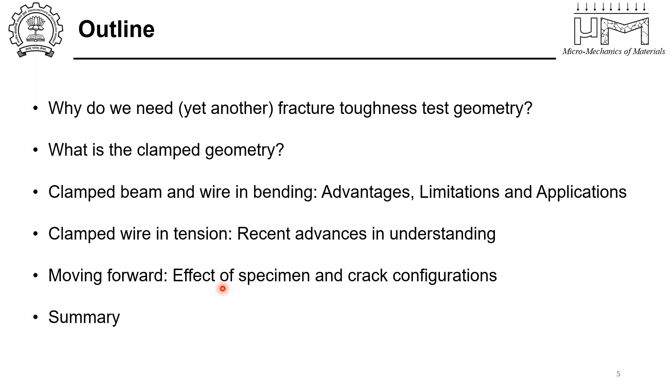Then I'll talk about the details of the clamped condition for both the beam cross section and the wire cross section, the advantages, limitations, and applications of the same. Then I'll talk about the clamped wire in tension as well. Although in tension, these wires have been very well studied, but we have come across some recent changes or advances in understanding them. So I'm going to talk about that if time permits. And moving forward, where we are heading with respect to specimen and crack configurations, what effects they have on the measurement of fracture toughness from different geometries. So then I'll summarize. So how do we assess structural integrity, right?

That is the key that begins all this story about measuring fracture toughness, first of all. So the structural integrity of any component, if one has to analyze, then there are three main components to it. One is that you need to have a stress analysis carried out for that structure. You need to find out where there are maximum stresses, which might be the pressure points for failure. So that can be done with some model structures where you apply real-time loads, or by numerical finite element sort

of modeling techniques. Then, of course, you also need to know the largest defects and their distribution in such a structure, which is usually done by non-destructive evaluation techniques. But the third critical segment of this structural integrity assessment is the measurement of fracture toughness itself, because you need to know at what point the material will break, right? So what is the critical load that it can take, given that there are certain defects of a particular size.

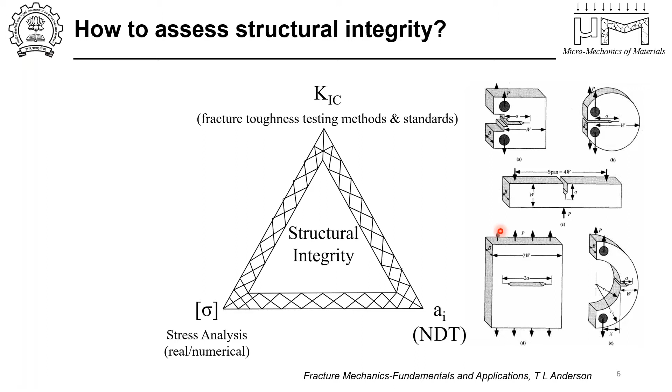So for that, one needs to evaluate materials' fracture toughness and the crack growth mechanisms in these materials. And that comes under the domain of fracture toughness testing methods and standards that have been developed. And if you look at all the useful fracture toughness test geometries, they all have originated due to practical considerations of the material, right? We could have just one testing method, like you have when you're looking for yield strength measurement. You do a normal uniaxial tensile test. But in case of fracture toughness testing, the origins are more practical, and people have come up with various geometries in order to not change the specimen, instead use the specimen configuration that is existing and measure its fracture toughness.

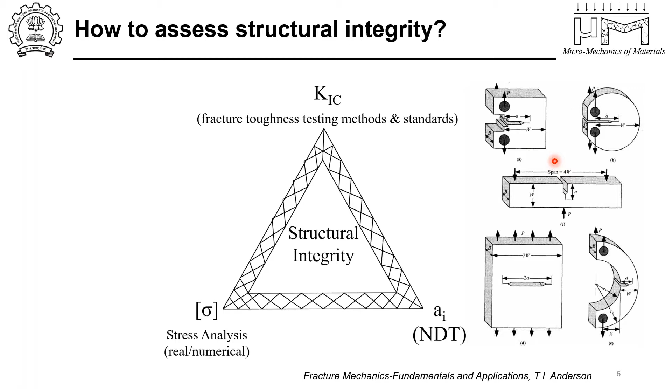For example, if you have a disc-shaped specimen and then you have a disc-shaped compact tension, if you have a half disc-shaped specimen, then you have something like this. When you have brittle materials, then you have what is called a single-edge notch bending specimen, and so on. So there are tons of geometries that have come from practical consideration. So I'm going to tell you why we came up with yet another new geometry, and that origin has come from us trying to measure fracture properties of materials at smaller dimensions or smaller length scales, where none of these geometries or their boundary conditions would work very well. So before I begin, I do not know the particular audience, so just to give a short introduction of what

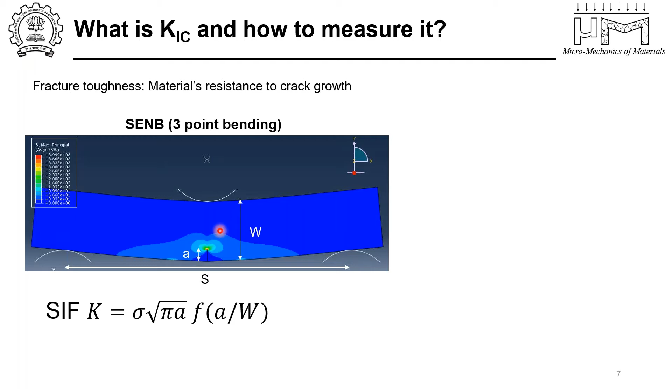But not only that, there is a singularity that emerges in front of the crack, and the amplitude of the singularity is given by what's called K. So if you see, there is another factor here that comes up, which is called the geometric factor, or what can be called the normalized stress intensity factor. And that refers to the strength of the geometry in concentrating that particular K in a particular way. So I will just show how you measure a fracture toughness from that.

So you load such a specimen, and you see that it breaks at a critical load. If it's a linear elastic brittle material, then you would just see a linear elastic load displacement response and then a fracture point. That critical load gets converted to critical stress, and the corresponding critical stress intensity factor is called otherwise the mode 1 fracture toughness of the material. So basically, we are trying to measure the material's resistance to crack growth and not to crack initiation. So you already have an initial crack that is set up in the material. And the geometric factor for a 3-point bending beam, which looks like this, is a complicated formula that is obtained either using numerical solutions or analytically if it's a simple configuration. So basically, for measuring fracture toughness, you need a simple configuration whose stress state, the far field applied stress state, is well known, and the initial crack length is also well defined.

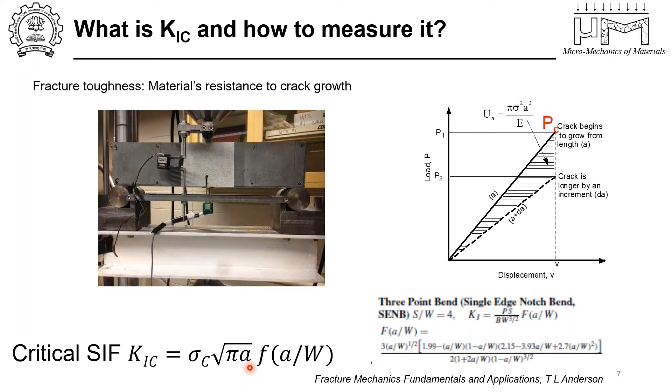So that tells me that the severity with which this bending geometry will cause a crack to grow will be much higher than the one for the DENT or the CCT specimen. Basically, for a given material with a material property of K1C, the fracture load for a SENB specimen is going to be much lower than the fracture load for the DENT or the CCT specimen. So one cannot make sense out of the fracture load; one has to make sense of the fracture toughness that you get. In a way, the geometric factor is a measure of the severity of the geometry to propagate the crack. So each of the stress states will cause a different magnitude of the driving force for crack growth.

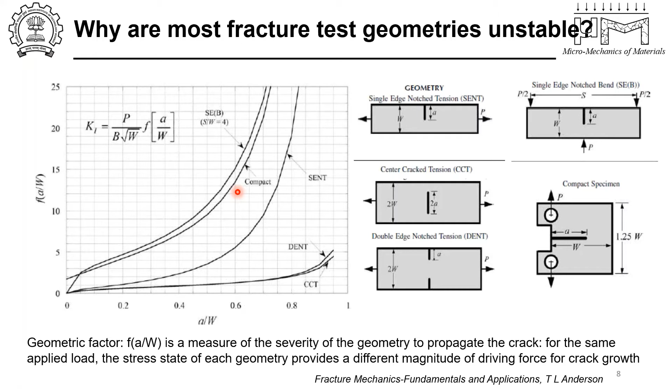So why can't we use these existing bulk testing standards? Because we are in the age of miniaturization. We are dealing largely with coatings, with thin films, with microelectronic devices where each of the individual components is at the nanometer to micrometer length scale. Within them, there are lots of gradients in microstructure and composition, and the properties at each of these points will be very different. Making or cutting out a sample which will look like a 3-point bending beam will be next to impossible, because where do we put the roller supports for a beam which is just about, let's say, 10 or 50 microns in length?

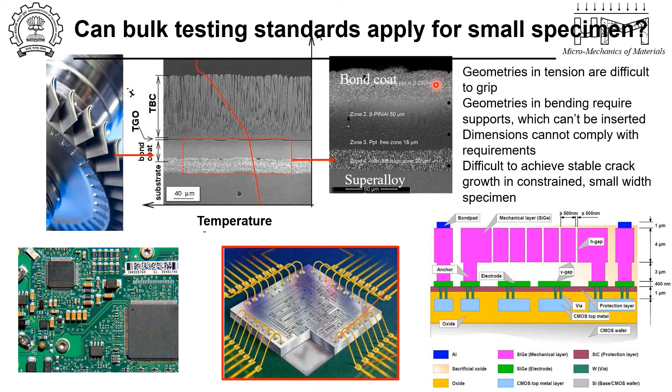Geometries in tension become very difficult to grip because these are very brittle materials. Geometries in bending also require supports which cannot be inserted. The dimensions will not comply with the ASTM standard requirements. And there is difficulty in achieving stable crack growth in such a small width of the specimen itself. If I have to make a specimen within this region, then it's very hard for me to have any region that can achieve a crack growth which I can observe during the loading process.

So then, why do we have to look at a particular application? Why can't I just use the bulk K1C that I know of? For example, for PtNiAl, I can cast a bulk PtNiAl and try to measure the K1C. But of late, over the last few decades, it has been clearly seen by a lot of researchers that the material properties are vastly different at micron length scales compared to the macro length scale.

For example, what is shown here is BaTiO3, a barium titanate single crystal. BaTiO3 is extensively used in piezoelectric and ferroelectric applications, which means it's used at small length scales in the form of thin films, and even as single crystals it's used in microelectronic devices. So if I make pillars of this particular material and push them in compression, I see that the yield strength of the material, or what I call the failure stress, keeps on increasing till it reaches near theoretical strength values.

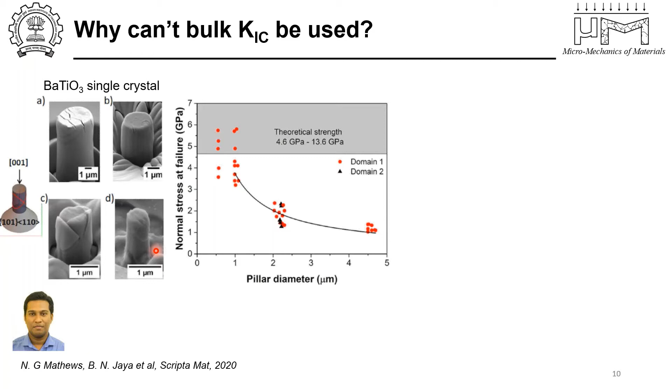Now, the explanation is not something I will go into in detail, but all that you can see is that the yield strength of the material itself changes and the failure mode changes from cracking to plastic deformation or flow. So these vast changes that occur with smaller length scales then bring us to the point of what happens to fracture toughness.

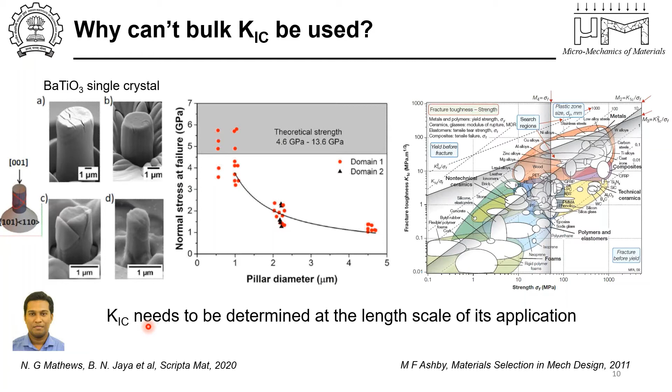So these are the reasons why we wanted to look at K1C at the length scale of the application of that particular device or structure. So coming to what this particular geometry is, the clamp beam bend geometry. For those who want to know more, there are a lot of papers that we have published on this particular geometry, and they can have a look at it later. I can also give a link in the chat section at the end of the talk.

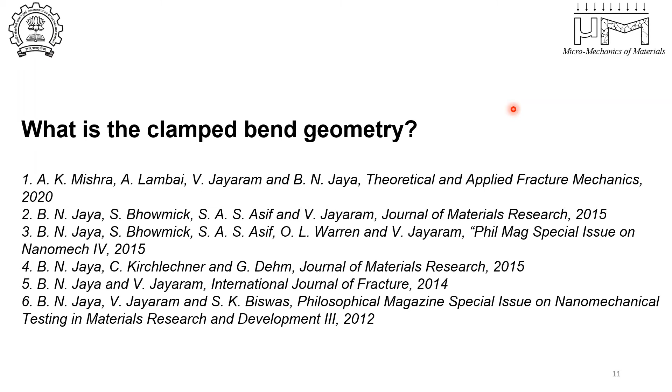So it came up as a sample that was given to me, which was a coating very small in length scale, about 100 microns in width, and we were wondering how to test the fracture behavior of such a geometry. The idea that came to us was from two different length scales. One is this bridge structure. We see these bridges all the time, and you have the two ends fixed, and you have the beam that is supported, but it's not simply supported, or a 3-point bend configuration. This is actually a doubly clamped configuration. So this is what I call the clamp beam.

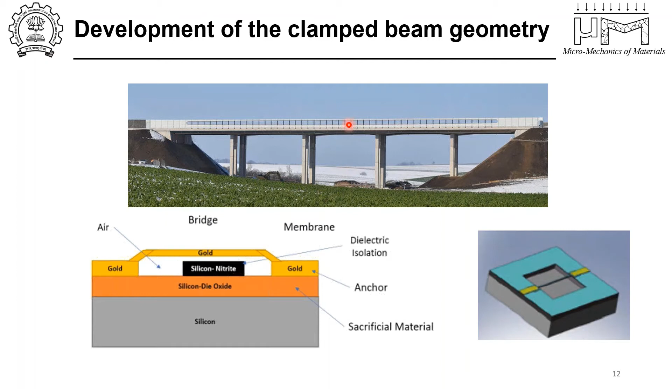Now, such structures were also very visible in microelectronic devices, because they would make them by lithography and etching, and you will see this segment which is stuck to the material at the two ends. So this is elastically clamped at the two ends, and you would see the beam that is available for testing. So clearly this looked almost like a 3-point bending beam. So we went ahead and tested a particular sample. In the present days, we have various facilities for micromachining, like focused ion beam machining. We have facilities to micromechanically load them using a nano indenter, and you can watch it in situ using an electron microscope. So that was what was done here.

So if you look at the video of this particular clamp beam, which is being loaded now, you can watch what happens as the crack tends to grow. This is a brittle intermetallic material, platinum nickel aluminide. But you see that the crack grows progressively for some time, and then it actually stabilizes, and the material is able to take higher and higher loads. Now, is this a material property that it is able to take higher loads, or is this something to do with the geometry itself? This is what we were perplexed about.

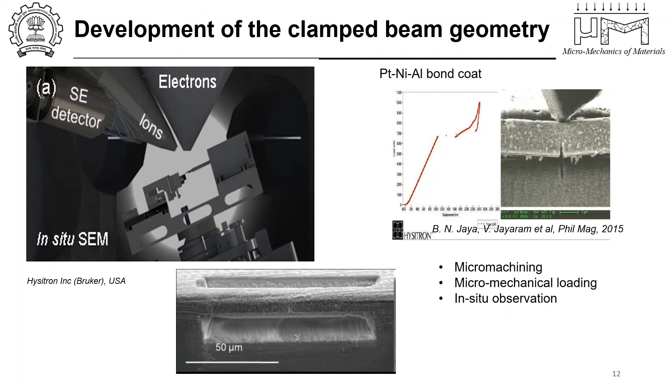We assumed that one could use the single edge notch bending configuration to obtain the K1C of the material. So we took a look at that. We modeled the 3-point bending beam and the clamp beam bend configurations, and obtained the stress intensity factor K1, plotted as a function of the different a/W. Now if you remember one of the slides that I showed early on, the single edge notch bending beam shows a monotonic increase in K1 with increasing a/W. But the clamp beam bend did not seem to do that.

It in fact increased and stabilized, and in fact decreased after a particular a/W ratio, which means that for a beam with a crack length of, let's say, a/W of about 0.4 or 0.5, I see a decrease in the driving force for crack growth as the crack increases in length, which means I need to apply a higher load to continue to break that specimen or continue the crack to grow, even though the material's fracture toughness may be constant across the width of the specimen. So that is what this implies. And we wondered why this was so different.

And then we realized that the stresses that concentrate at the tensile edge for a 3-point bending now have 3 different positions or locations to concentrate in. So that's the center and the 2 edges where we clamp the specimen. So this gave us a clue about why there is such a large difference as you increase the crack length.

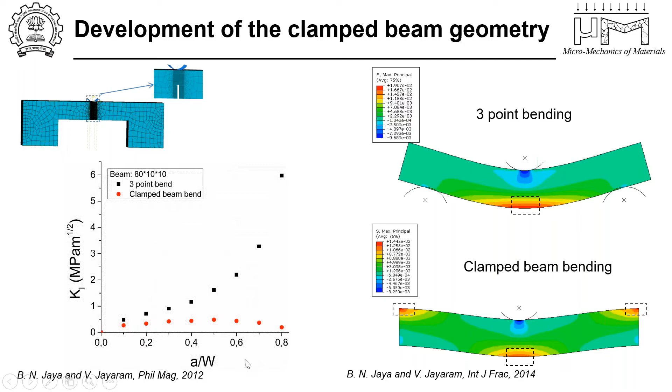So we evaluated the normalized stress intensity factor, which is nothing but the geometric factor that I was talking about earlier as well, for different a/W's and for different L/W ratios. When I say L/W, it's the length to width of the specimen. So in the future, I would call this the beam aspect ratio. So this is the relative crack depth, and this is the beam aspect ratio.

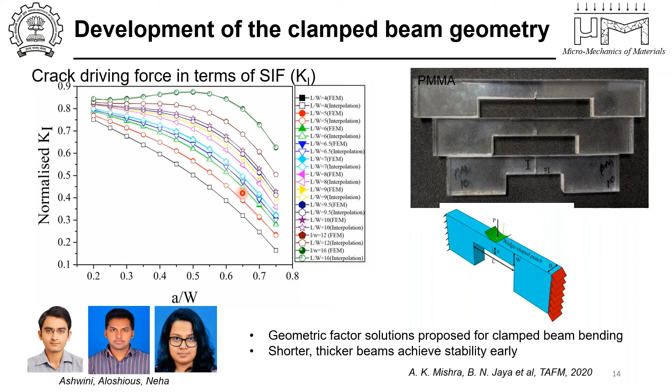But we've provided the geometric factor solutions for various L/W ratios. So if you make a beam of different values, you can still obtain the fracture toughness using these solutions that we provided. So basically, we did these measurements, which I'll come to later.

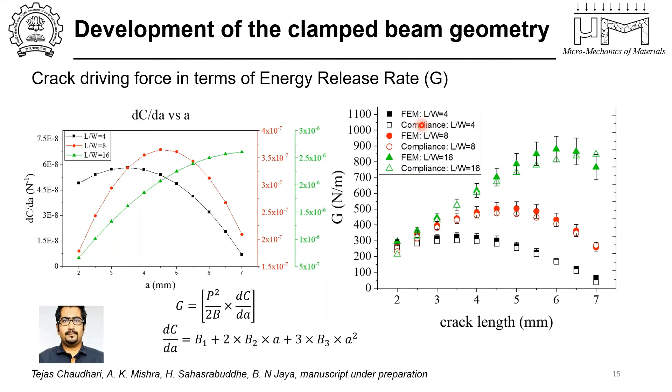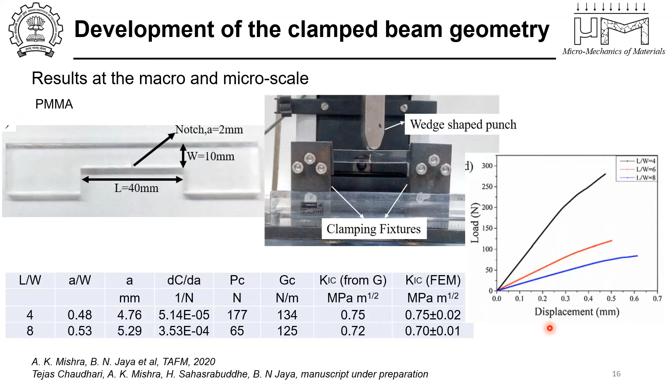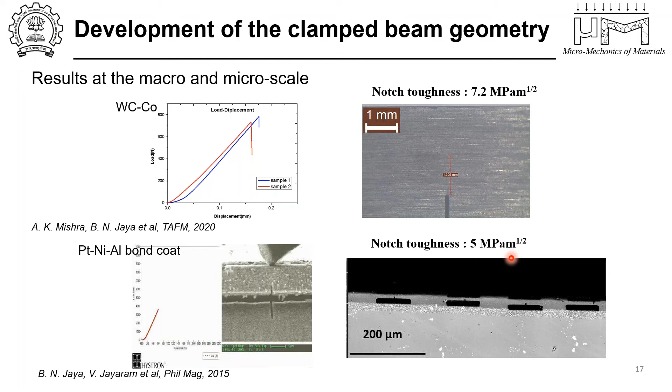In the bond coat, like I said, the video that I already showed, for that particular specimen, we could measure a fracture toughness of about 5 MPa root meter. So all of these we applied as of now, as of today, only for linear elastic fracture mechanics. We are in the process of developing the same for elastic plastic, but we have not made much headway there.

The next I'll come to is the clamped wire geometry, which is a modification because we were dealing also with wire or cylindrical wires which had a circular cross section. These were used in a multitude of applications, including in suspension bridge cables where you have these high strength pearlitic steel wires. There are also wires that are used in copper interconnects and at the small length scales. So there are again variable length scale applications, and length scale compatibility is important here as well.

The other point that was of importance was the wire length, again, the aspect ratio of the wire. Here we talk about the aspect ratio as the height versus the diameter. So that aspect ratio is also a variable. Let's say I pick up a fiber and each of the fibers has a different length. It's very hard to cut that particular fiber. So I make a notch and I test them under bending. Then I should be able to extract the fracture toughness of that particular fiber. And then I can incorporate that in certain micromechanical models where I look at composites and so on.

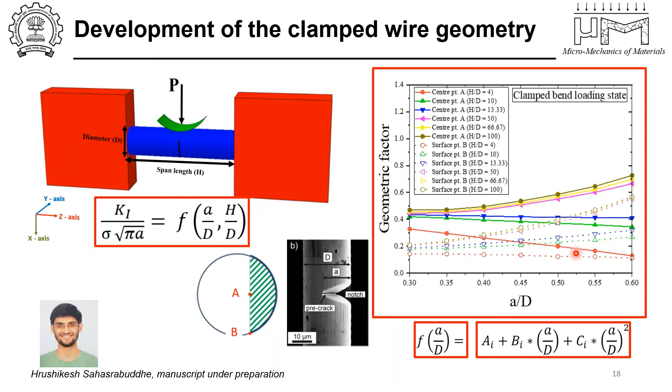And as you can see, again, for small aspect ratios, there is a good chance that the material shows stable crack growth. Whereas for the longer ones, you don't see that kind of stability for longer cracks. But even for the larger aspect ratios, there is a range of crack lengths where the crack can grow stably in these wires. And in these wires, this happens because the cross section that the crack propagates into does not remain constant. As we go from 0.3 to 0.5, in fact, the crack is expanding in area. And then from 0.5 to 1, it is decreasing in area. So that is the reason that you see this kind of scatter or difference.

But why does it show a difference in terms of the H by D? So what we have plotted here to explain the same is the maximum principal stress at location 1 with respect to location 2. This is in front of the crack tip, and this is at the two fixed edges of the wire or the beam. Now, if you look at a small crack of A by D of 0.3 versus a long crack of 0.6, let's say the crack grew from 0.3 to 0.6. Then for a small aspect ratio wire, the max PS in fact decreases at the center from this ratio of 4.03 to 2.59. Whereas for a longer wire of, let's say, 50 or 100, the max PS at location 1 increases from 7 to 15.

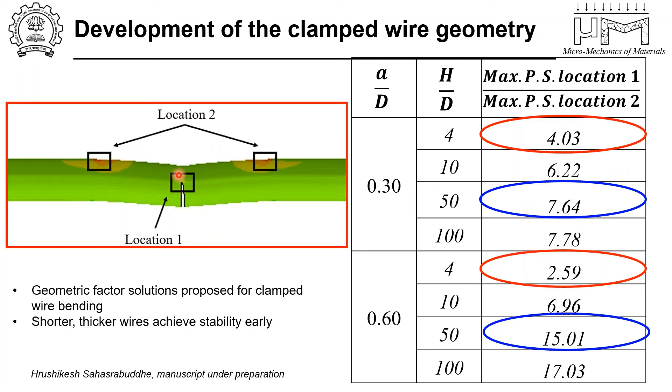So what this tells us is that for shorter wires, the stresses at the edges become concentrated and sort of take away the driving force from the crack tip at the center. And because of which the driving force for crack growth goes on decreasing as we move to longer crack lengths. But this sort of advantage that is provided by the shorter wires goes away when you have longer wires, because now you are very far away. The boundary condition is so far that the specimen almost behaves like a tensile specimen. It does not see the effect of the two edges, and the crack continues to grow in an unstable manner.

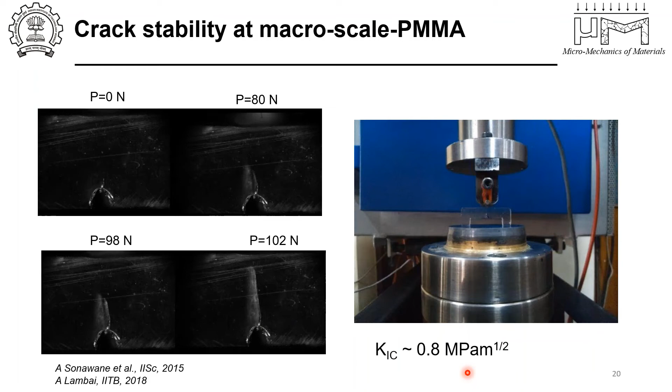So this crack stability was demonstrated at both bulk and the micron scale. This is a sample that was carried out in IISc, where you see that at different loads, you see a stable crack growth in glassy structures and in PMMA, and with higher and higher load. But the K1C of the material was constant. If you measure the K1C at each of these individual load drops that we saw, then it would be a constant because it's a monolithic material. The fracture toughness of the material is not changing, but you can achieve stable crack growth.

Same thing with single crystal silicon. This is what we measured with micron scale specimen. As you can see, there are two different segments. The first loading cycle, the sample undergoes crack growth, so there is a displacement jump.

Corresponding to that, we measured a fracture toughness of 0.86 MPa√m. We reloaded the sample. Now it loads at a lower stiffness, but it takes up a higher load before it finally breaks. And the corresponding fracture toughness is 0.81. So there is not much difference in the fracture toughness at the different crack lengths that you see.

Again, not expected for silicon. It's a monolithic material whose fracture toughness should remain the same. So crack stability was something that we demonstrated.

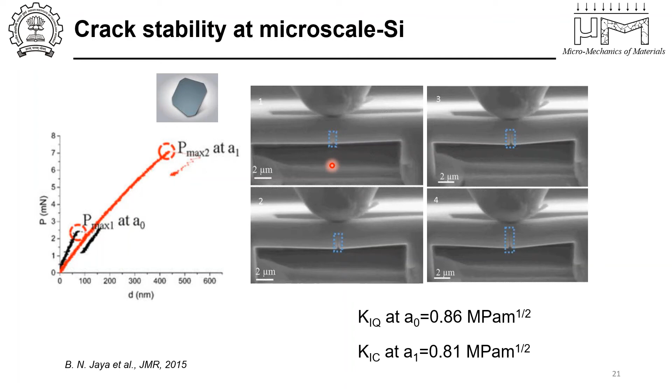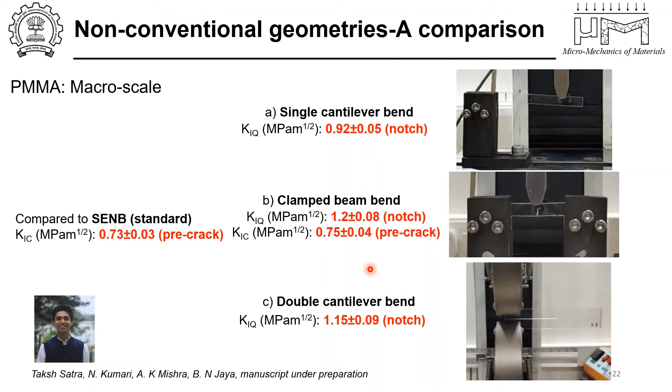Very quickly, we compared it to other geometries which were non-conventional that were being used at the micron scale. For example, the single cantilever bending, the double cantilever bending, and so on. And we saw that for all of these cases, within about 15% difference, all of them perform pretty well, given that some standards are followed with respect to the calculations of the geometric factor. Same at the micro scale, we looked at single cantilever, the clamp beam, the double cantilever, and the pillar splitting geometry, and all of them gave very similar values of fracture toughness.

Now, coming to some of the applications, what is shown here is a graded coating. This is a platinum nickel aluminide bond coat with a microstructure which is very heterogeneous across its cross section. So these are the different zones that we have identified. Not getting into the details of this, but there are various types of crack growth mechanisms operating in individual zones, and the monotonic fracture toughness of each of these zones happens to be very different, and that you can measure only when you do micron scale testing like I was showing earlier.

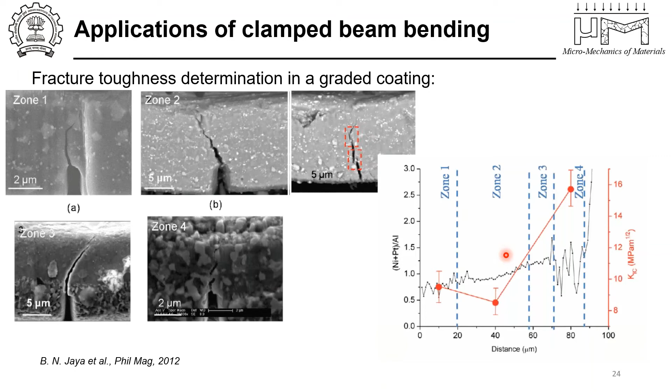So this is something we could record, and we could say where the coating would be the most vulnerable. Of course, under actual service loading conditions, it would be either at the substrate-coating interface or right at the surface between the bond coat and the free surface. But the fracture toughness happens to be lower at the free surface end, whereas it's much higher at the interface between the substrate and the coating. So there are some predictions that you can make and put into models and look at what happens to crack growth in these kinds of coatings.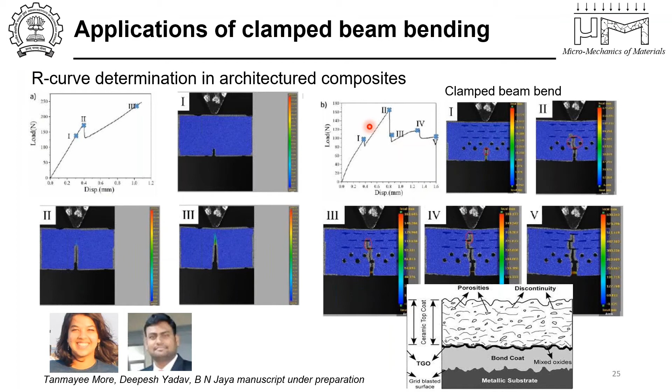And we wanted to see what happens if you just create these holes, because this will make my material less dense. But what it is clearly showing is that the crack grows in one shot for the bulk solid beam, whereas if I have an architecture beam, then I see a number of load drops, corresponding to which I see the cracks deflecting and blunting and so on. So I achieve a much higher fracture energy before it completely breaks. So the damage tolerance is improved when I make these architecture composites.

And I could not measure this very clearly when I did a 3-point bend test. When we did a 3-point bend test, the number of load drops is much less. In fact, it looks pretty similar to what a monolithic material would look like. That's because this geometry is not stable, whereas the clamp beam bend is a very stable geometry. So I can record each of the load drops, and each of those load drops corresponds to the crack moving to the individual features, and that can be recorded, and the R curve can be later determined.

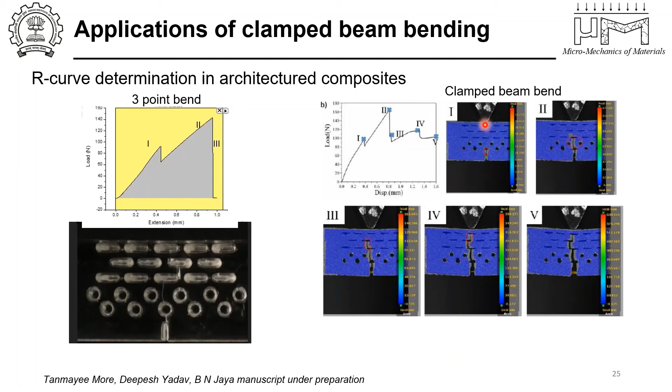The third thing that we are also interested in looking at is how the R curve behavior affects a layered composite film. Let's say you have a multi-layered material. One is a ceramic, hard and brittle, and one is the metallic layer. Individual layer thicknesses are very fine, and the total thickness itself is about 2 to 4 microns. We wanted to again take up this geometry to look at what kind of stabilization, what kind of R curve behavior or resistance to crack growth this multi-layering will provide.

So again, when you have a stiffer layer, the stress intensity factor that the material should see in front of the crack tip will go down, because it's sort of going to close the crack. Whereas when you have a compliant layer in front of the crack tip, then it sort of opens the crack and the driving force will go up.

So this is what we could record. This is from simulations, and we are in the process of doing experiments to measure them. This shows that as the crack moves from the Ti to the elastically stiffer TiN layer, there is a drop in the stress intensity factor. But then again, when it goes through the TiN layer and approaches the Ti, there is an increase in the stress intensity factor. This is the K1 for a single layer of TiN, if it was a monolithic sample, whereas this is the case for a multi-layered sample. So there is a substantial difference in K1, or the driving force for crack growth, that one could record with this particular geometry.

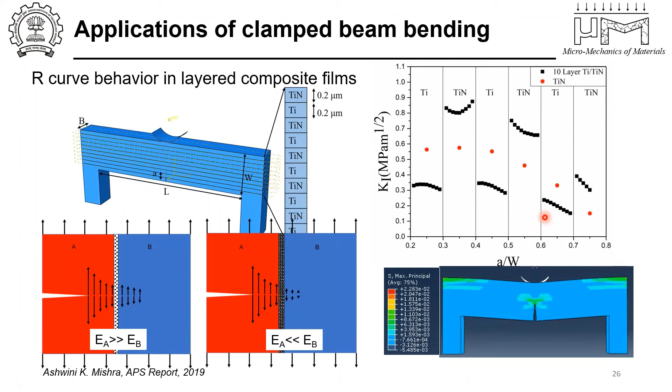Then there are other people who have worked a lot in this particular domain to, for example, elucidate the different mechanisms that occur in brittle systems as a function of temperature. This is an example for silicon, where it was heated to different temperatures and tested at those temperatures. And one can clearly see dislocation mechanisms that come up, which you would otherwise not be able to see, because if you don't have stable crack growth, then this beam is completely broken and you will not be able to take out a specimen and image it like this. So different mechanisms become obvious when you have a stable geometry.

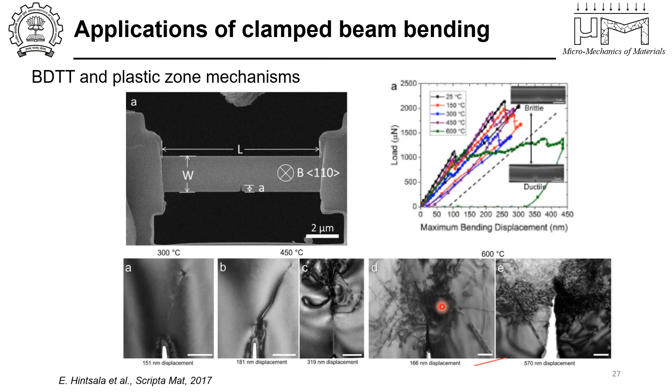Similarly, when you have cyclic loading or fatigue applications, then slow crack growth can be easily captured using clamped beam bending. There is a good amount of work published by Professor Vikram Jayaram's group, which shows the change in stiffness and correlates it to the increase in crack length corresponding to different numbers of cycles, and one can predict the fatigue failure in structures, including in thin films and coatings as well.

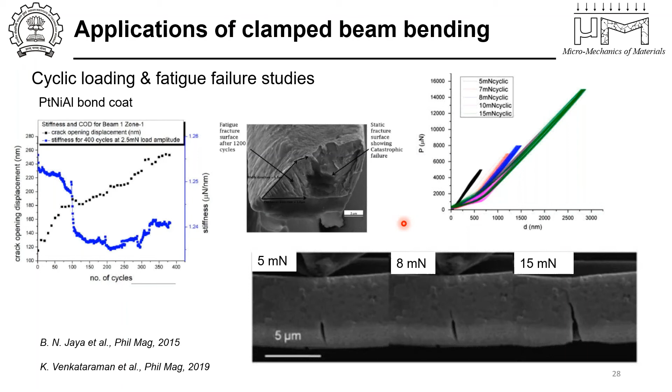Then there was a recent work that we came across, which uses the clamped wire condition in bending, using a biological composite, which has a cylindrical structure with a circular cross section. If you can see the dimension, this is just about 20 microns in its cross section. And they could make a notch and determine what is called the R curve behavior of biological composites and explain the mechanisms, again just because you can stabilize the crack.

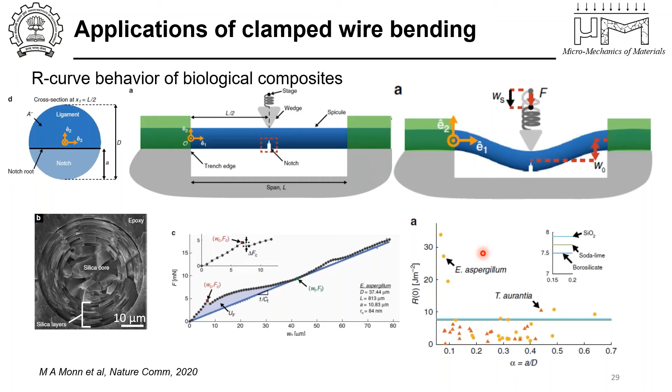So does it mean that there are no problems with this geometry? Clearly no, there are challenges. One thing is about using the right kind of punch. Many people end up using a Berkovich tip or a cube corner tip to do these kinds of micro scale tests. But what you should ideally use is a wedge tip with a particular radius, and the radius of that tip will also depend on whether you have a low yield strength material or a high yield strength material, and whether you have a low aspect ratio or a high aspect ratio of the beam.

For a given fracture toughness of the material, if I keep the K1C fixed, then the critical load at which the material would break would be higher for a lower L/W, or lower aspect ratio beam, but that also corresponds to a higher contact stress at the point of the punch making contact with your beam. So one should not allow yielding to take place because of contact. That is the problem that we need to overcome, and it can be overcome by using a larger radius of the punch or the indenter.

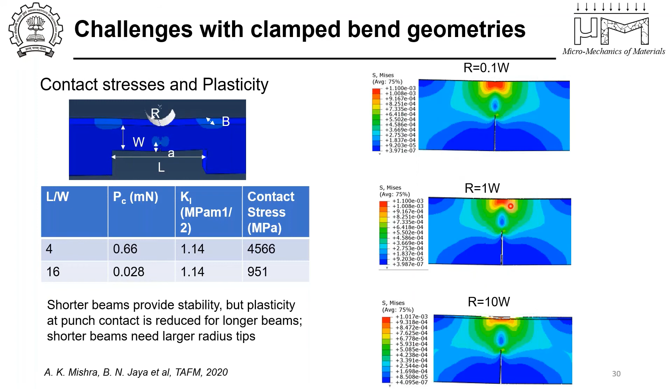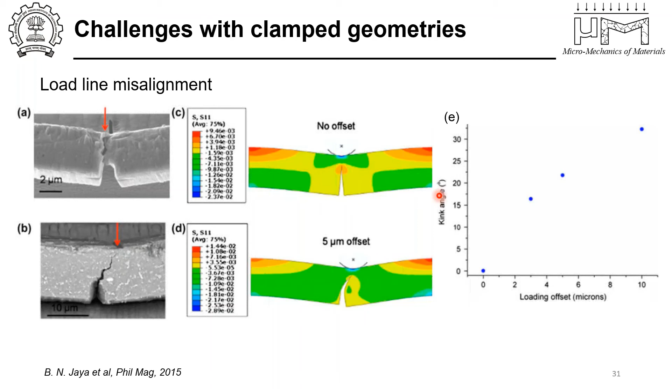But the problem with making larger radius punches is that the alignment with respect to the crack length will then sort of go haywire, which is what I'm going to show next, because load line misalignment is another issue. If you have a misalignment with respect to the notch tip, then you will have mixed mode crack growth rather than mode 1. So you'll be measuring what is called mixed mode fracture toughness. But one can, of course, simulate or model this and look at the extent of K2 over K1 and be able to separate out the contributions from this.

The third important problem with this geometry is edge cracking. Because it is held fixed at the two ends, the higher stress concentrations there will lead to defects flaring up and cracking at the fixed edges.

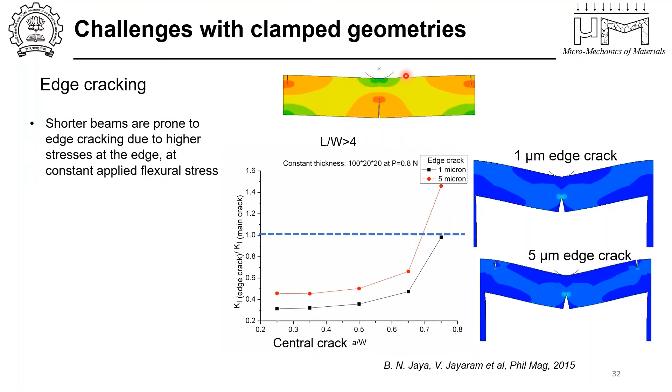Again, shorter beams are prone to this because they are subjected to a higher load and therefore a higher stress at the edges. So one needs to find solutions again. One of the solutions provided by another group was to make this sort of bow-type specimen, where you increase the thickness of the beams along the edges so that the stresses don't concentrate so severely anymore, and you see the main crack growing across.

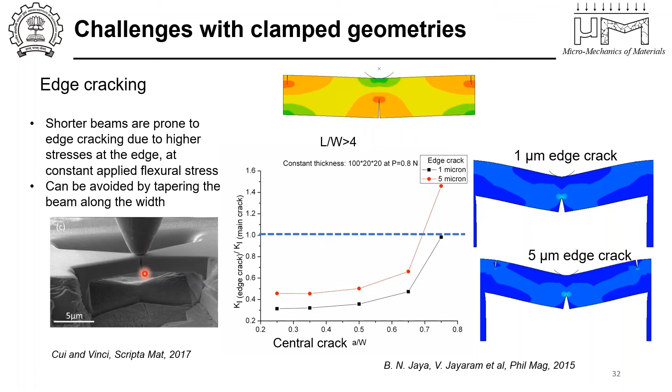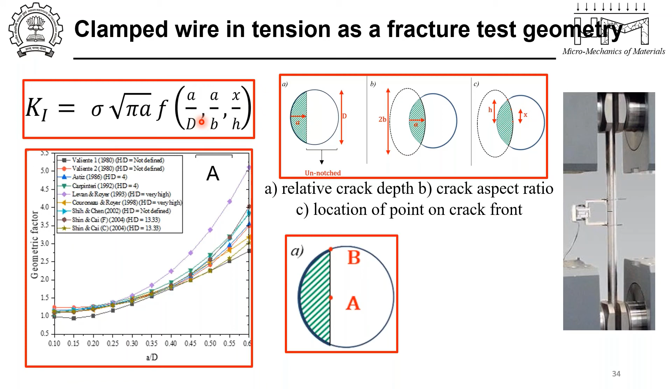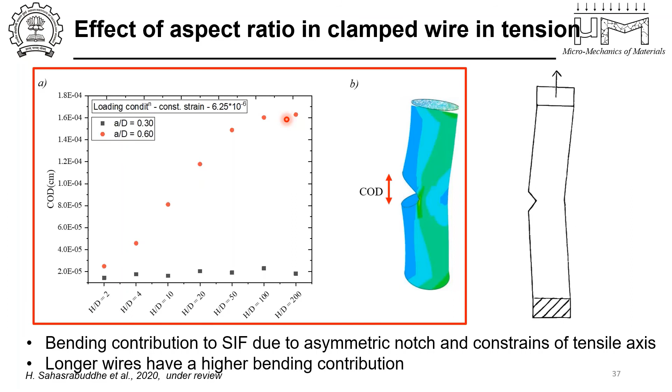Now, why is there the aspect ratio effect at all? That is what we're trying to show here. Suppose you have a tensile sample with an asymmetric notch, that is, a one-sided notch. That causes a bending contribution to come up because the tensile axis is constrained. So when the crack opens up here, this leads to bending in the x direction. That bending contribution increases the K1. The COD going up also shows that there is an increase in the K1 for longer aspect ratio wires, whereas that effect is smaller for the shorter aspect ratio wires. This is all for the same applied far-field stress. So the stress is constant here.

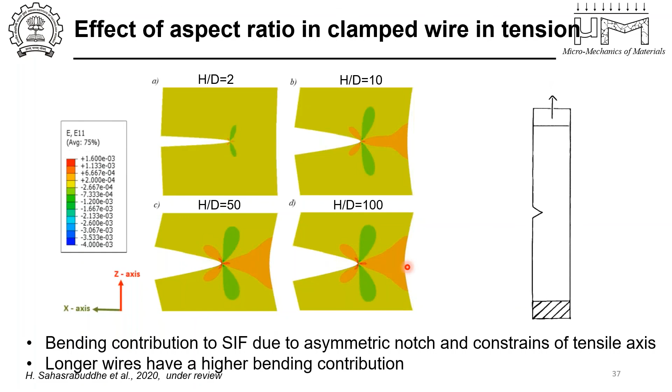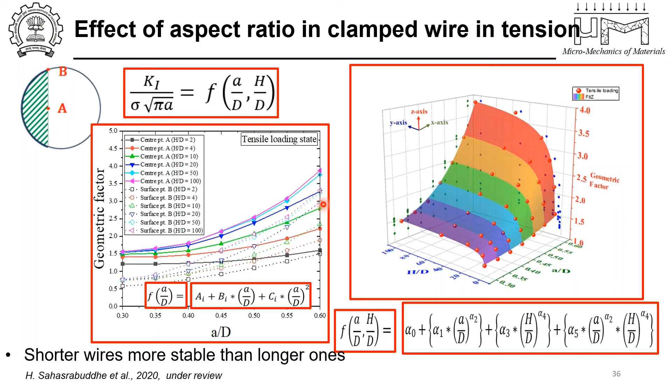So this is the conclusion we come to, that the asymmetric notch results in a bending superimposition on the tensile load, which is what results in the severe effect of the aspect ratio. But this plateaus at larger aspect ratios. So if you have very large aspect ratio wires, then you don't have to care about the H/D. This is something we also saw here, that they plateau and fall on top of each other when you have higher H/Ds, but it becomes important when you go to lower H/D values.

So again, we did validation of clamped wire in tension, but this is not a wire. This is a rod specimen, again with PMMA, because that's the cheapest material that we could lay our hands on. We measured the fracture toughness for two different H/Ds of 2 and 10. The value that we get, which is close to 1 MPa√m for the notch toughness, is closest to what is reported in the literature, whereas all the other solutions provided by other authors, some of them in fact, overestimate the fracture toughness by a lot.

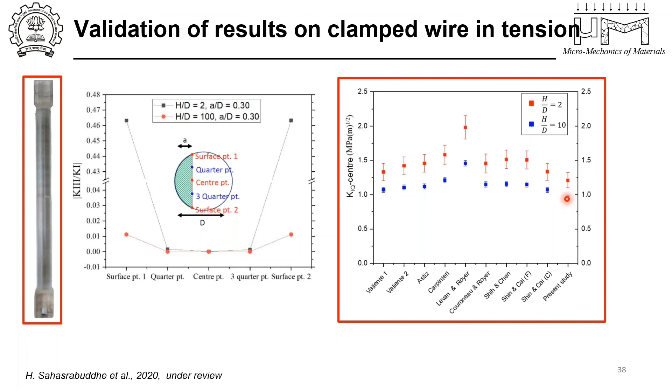Now there is still a difference between the fracture toughness obtained at the aspect ratio of 2 and 10, right? We are hypothesizing that because of this bending, there is a contribution of mode 3 that also occurs, and the H/D of 2 sees a more mixed mode fracture as compared to the H/D of 10. I'm not going to get into the details of that, but that's something we have explored.

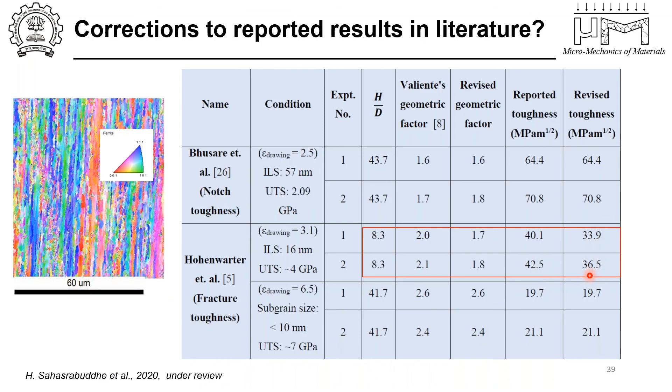And using these revised solutions, we have proposed that some of the reported values of fracture toughness need to be revised, especially the ones which have been tested at smaller H/Ds. They in fact need to be revised. This is for cold drawn pearlitic steel wire, which is what we started out with. The fracture toughness values that were reported were about 40 MPa√m, but our recent calculations gave a slightly lower value.

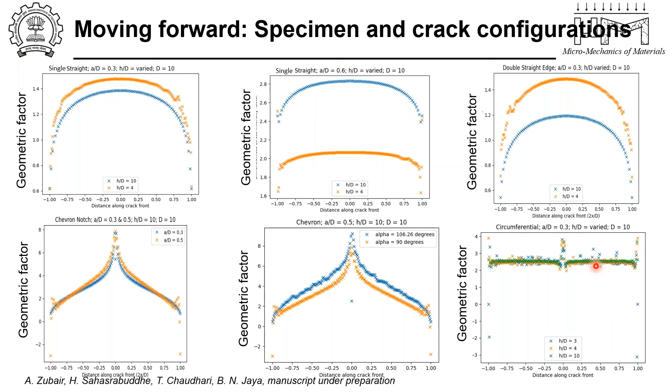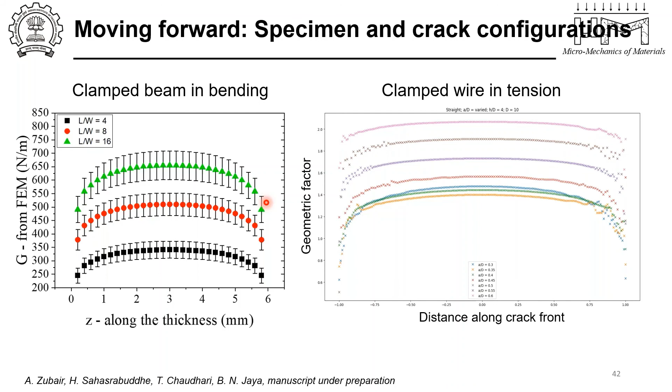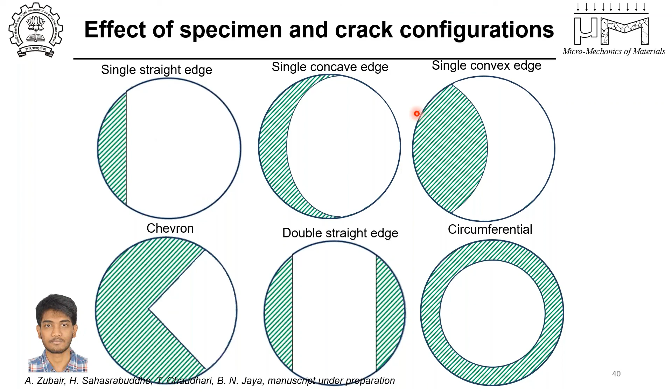This I will skip, but I wanted to say that the position along the notch tip also matters, and you can predict in which way the crack would grow for different configurations. For example, for this particular specimen, the stress intensity factor happens to be highest here compared to here, so the criticality is reached here first. So a straight edge sample would convert to what is called a convex edge sample. If you do a fatigue pre-cracking, then this is how it would look. Then again, whether you can use the geometric solutions of this or should go for this, and so on. The nitty-gritties of that are also being explored.

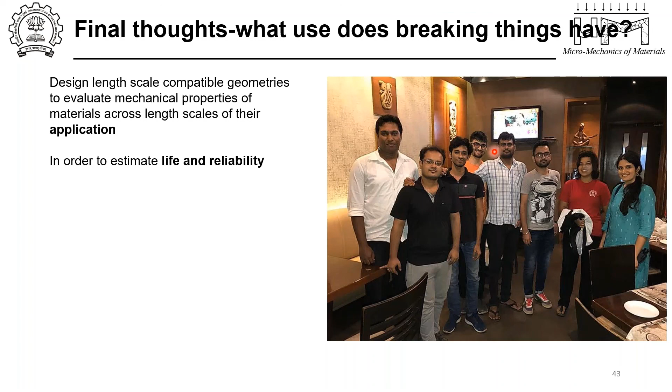Yeah, so final thoughts. What use does breaking things have? Well, we would like to design length scale compatible geometries to be able to evaluate mechanical properties of materials across the length scales of their real applications in service. I hope I have convinced you that it's important to measure at the length scale of application, because sometimes you don't end up getting the microstructure that you would see at the smaller length scale at the actual bulk length scale. So this is important to estimate life and reliability.

And that is critical for structural integrity assessment in order to extend the life of these systems or materials by redesigning or engineering architectures that enhance the fracture resistance of materials, like we are doing with certain architectures and multi-layers and so on. That would of course improve the life and sustainability of these structures. And of course, the most important and primary reason that we are doing this is because it's fun inventing certain geometries and looking at them.